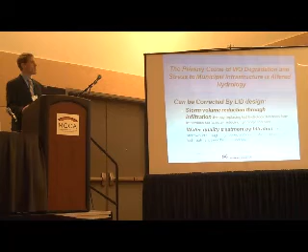So it'd be nice to say that we see a clear trend. The wet ponds in general do perform somewhat reasonably well. The dry ponds don't do very well at all, and the swale really has no pattern of performance. That represents 95, 96, 97% of our stormwater management today. That explains much of our current water quality woes. So the primary cause of water quality degradation and stressed municipal infrastructure is very simple. It's altered hydrology. And this can be corrected by LID designs.

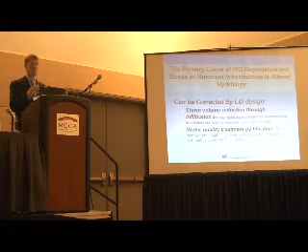LID designs look at storm volume reduction through infiltration, so basically recreating that hydrologic cycle, putting some of the water back into the ground. And that same element of filtration or infiltration has a water quality benefit. You're essentially using a natural soil or an engineered soil media to do much of your treatment. LID designs are not rocket science. It's important that they're built right. It's important that they're designed right.

But in effect, much of what we're building are stormwater leach fields. We've been building septic systems for a long time. We've been using sand filtration for drinking water treatment for hundreds of years. These concepts are well-proven concepts. We're now just beginning to apply them to stormwater management. So that's where the Stormwater Center comes in.

Our function is really two-part: research and development of stormwater treatment systems, and secondly, to provide an education and outreach resource to stormwater management communities. The function of the Stormwater Center is for us to test stormwater management designs to see what works and what doesn't work so that you don't have to.

If you have ever been through the design and planning of a stormwater system and had to go in front of a planning board or town council and go through the process of trying to convince folks, if you then have a system fail, that's the last time anybody's going to try that in that town for quite a while. So you want to have the bugs worked out in advance.

So a little bit on the Stormwater Center. We have a 9-acre field. We have a 9-acre watershed. Everything is plumbed to the corner of the lot. The lot was actually built in 1996. And we built this site in 2003. All the water comes to the corner of the site and is then plumbed into parallel treatment systems. So we have a 1-acre site. We've tested a little over 20 systems now.

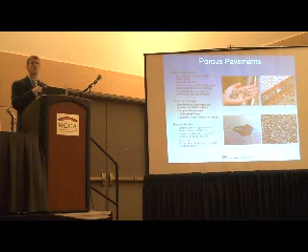So a porous pavement system has a pavement on top and then has a fairly sophisticated reservoir subbase underneath it. There is a storage reservoir, there's a filter course, and then there's a capillary barrier. The capillary barrier would be the bottom layer that you would design to reduce freeze-thaw impacts in northern climates.

Pervious concrete. Probably the most important element to know is it's very tough to install. You need to get qualified installers in it. When you get a quality installation in place, it's bomb-proof, and it'll last for a very long time, and probably outlast any other pervious pavement. But it's hard to install.

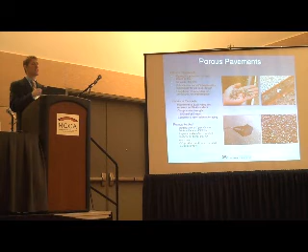Porous asphalt, on the flip side, is very easy to install. If somebody has installed asphalt before, they can install porous asphalt. The difference being that the subbase is critical, and that the mix is important. So the design, the mix production are really the key elements. And when you look at porous pavements, it's not hard to find a lot of failures out there. I would say the majority of failures are really two reasons: poor mix production and poor engineering oversight.

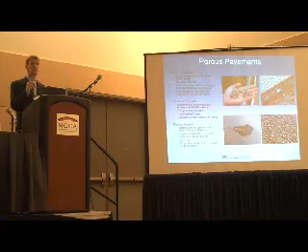It's not like a lot of projects where engineers design them, they sign off, and then they're lucky if they see the site again. You need to pay attention to the compaction of the site. You need to pay attention to the mix that's being delivered to the site. It's a lot more than a traditional parking lot.

So how do they work? Let's give you an example here. This would be the equivalent of a 43-inch rainfall event in about 3 minutes. So in this area, that's roughly a year's worth of rainfall in about 3 minutes. This is a pervious concrete parking lot. In the interest of time, I won't let this run the whole time, but it's really quite impressive. And we actually did this demonstration last week where we're running one of our porous pavement workshops, and it functions the same in the winter as it does in the summer.

So this is an example of what performance looks like out of a porous pavement. So this would be our rainfall on the top. This is a 0.6-inch rainfall event. It's a pretty big storm. This is what the rainfall runoff would look like on an impervious pavement. Here is the rainfall runoff out of a porous pavement system. Okay, at about 800 minutes, it creeps out of it. There's almost no runoff. This is on a C soil. This is a site that a lot of folks don't even try to do infiltration on.

Porous pavements are really not your typical infiltration system. Because you don't have a high hydraulic loading rate, you have the same watershed area as treatment area. You're not constrained by the same challenges that you typically are with bioretention and other things. You don't have those limitations.

Here's a 3-inch storm. This is greater than the 2-year storm. This is a big storm. Here's your rainfall runoff on an impervious parking lot. Here it is about 1,000 minutes later, just creeping out of the pavement. And this is not surface runoff. This is not running off the top of the pavement. This is what's coming out of the subdrains of the system.

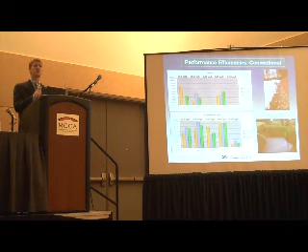Reason why I bring this up is one of the biggest concerns about LID is how are they going to function in the wintertime, right? Well, the first thing you do is evaluate all the systems, conventional as well as LID, across the winter. So here's our swale. This is probably 98% of what's out there. It's doing fine in the summer, does nothing in the winter. So an annual removal efficiency of maybe 30%. This is for solids, and in the interest of time, I'm going to focus on solids.

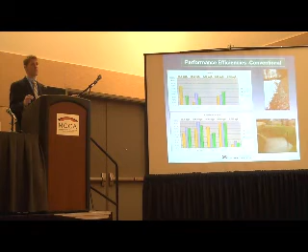Here's our pond. Does annual removal efficiency maybe 70%. So if you consider that EPA is in general looking at 80% removal efficiency for TSS, our conventional practices are not meeting that. Vegetated swale is slightly better.

If we move into the LID style systems, annual performance efficiency doesn't really vary. We're well over 90% removal efficiency for a bioretention system, and we're at about 99% removal efficiency for a gravel wetland. These are high-end treatment systems. They do a lot more. They're going to cost more, and you're going to have to pay closer attention to them. You don't get more for less.

Porous asphalt, and this is a subsurface infiltration system. These are the large chambers that go below parking lots. The reason I put these 2 systems together is because functionally they're very, very similar. It's the storage underneath the pavement and the fact that it's going through a filtration layer, which is essentially the sand underneath it. And you can see very, very high level of treatment.

So high level of treatment is not limited to LID, it's filtration systems, really. LID just happens to be an easy way to get to filtration. So here we're at about a 99% removal for both of these systems, both porous asphalt as well as ADS subsurface infiltration.

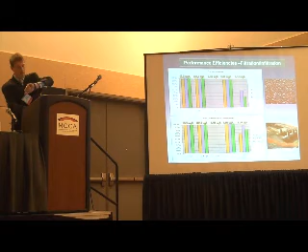5 minutes. Okay, 5 minutes. 5, all right.

Okay, so now we'll look at some of the manufactured devices. These are important systems to consider. Not every system can go in every location. You can't put a gravel wetland, which is 5% of your watershed area, in the middle of an urban location. However, if you have a dry pond in a location where you're in an impaired water and you need to identify retrofits, you can fit a very large system like a gravel wetland in a dry pond. It's a simple retrofit. But in a lot of urban locations, there are these types of systems that need to be considered. They go subsurface.

I do have hope for these things, though. The next thing we're going to be testing, offline configuration. If they're really getting 80% in the lab, they should be able to get 80% in a proper design situation. So it really is likely going to be that they have to be done offline, and that's what New Jersey DEP is now requiring.

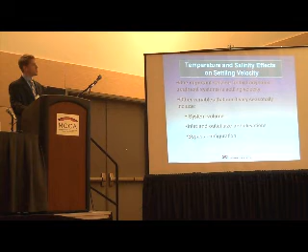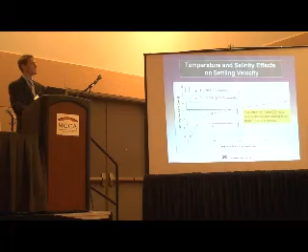The basic issues we look at, temperature effects, is really this. Hydrodynamic treatment systems, any system that relies on settling velocity is heavily impacted in the wintertime. And it's really this. Here's your 2 settling curves. Here's a settling curve in the wintertime, high chloride water, low temperature. Here's warm water, no chloride. And what you end up with is a system where the settling velocity for your particles have essentially been halved summer to winter, which means if you're designing for optimal performance, you're doubling the size of your system.

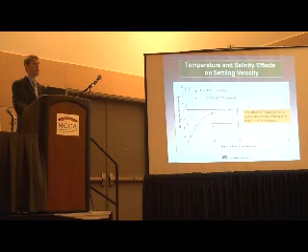I can tell you nobody's doing that. But if we are required to meet water quality requirements for wet weather monitoring, which here in Charles River now with the new EPA requirements that are coming up, you are going to have to be looking at water quality monitoring, not simply am I implementing my stormwater management plan.

So one other element to mention here is salt reduction. This hasn't hit a whole lot in Massachusetts yet. It's hitting in the I-93 corridor. EPA is beginning to pay attention to chloride loading, salt loading, and impacts to drinking water and groundwater. It's not a small issue. 4 of the 6 chloride TMDLs in the country now are in New England. This is a big deal.

And it's really a simple balance. How are you going to balance public safety with aquatic habitat? We know we're going to go with public safety. So salt reduction is not the simple answer. There's no way to treat salt with a stormwater BMP. One element of it, though, is looking at porous pavements.

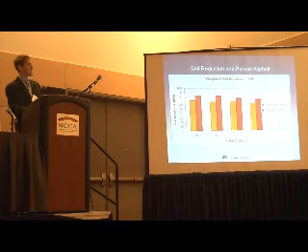But here's skid resistance. This is your braking ability. Higher the number, the better. Here's our 4 different application rates. The take-home message is that the 0% application on the porous asphalt has a higher friction factor than the 100% salt application on a regular pavement.

All right, and I'm actually going to skip this because I want to leave Sarah some time. So just what exactly is your point? It depends on what we're targeting. If we're targeting for the big stuff, we can get it easily. We can definitely get out shopping carts. There are no silver bullets. There's no one system that's going to do it all. Water quality, you have to target multiple items for multiple contaminants.

And really what we're looking at is treatment trains. Filtration or LID systems function well in cold climates. The best results are achievable through LID-style infiltration approaches. Pre-development hydrology is achievable for new development, and I already mentioned the need to employ a treatment train.

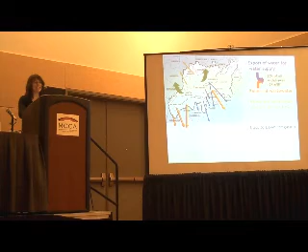In addition to the wastewater export, it's got infiltration into those wastewater pipes, which are taking clean groundwater out of the basin and shipping it out along with the wastewater. So that's further reducing the aquifers and the water table, and further reducing stream flow. However, exacerbating this problem is a lot of lawn irrigation, which creates loss because grass is very thirsty and sends that water back to the sky pretty quickly. And an increased loss due to runoff. So the flooding conditions that we see when it's storming are the counterpart to the fact that that's not getting back into the ground, as Rob mentioned. And it's the water in the ground that feeds our streams when it's not raining.

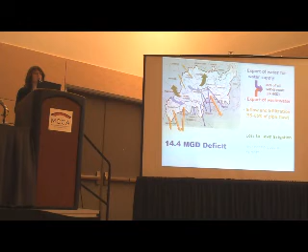So it's been estimated that the Ipswich runs at about a 14.4 million gallons a day deficit. That flow, on average, should be 14 million gallons higher. So we're not dealing with the export of wastewater at this stage, other people are, but under the grant we were looking at approaches to try to address some of the concerns associated with the lawn irrigation and the increased loss to runoff. So it's that last piece that I'll be talking about here, the low impact development work we're doing. Overall then, the grant is demonstrating low impact development to deal with that runoff problem. It's demonstrating water conservation projects to get at that lawn watering in particular and some indoor uses. And then we're quantifying all of our demonstrations and the impact that they're having.

And we have been, in conjunction with the U.S. Geological Survey, taking the data that we're finding and modeling at a watershed scale. Are we going to actually see a return of flows to the Ipswich if we were to spread these techniques across the watershed? And if everyone were to try to adopt some of the approaches that we're modeling, will it make a difference? And then we're also using our demonstration projects to educate people. What are we finding? What are the lessons learned when we implement them right here in New England and Massachusetts? And I'm going to talk particularly about the demonstration projects on the low impact development side. There's 4 of them. There's a subdivision, a green roof, some work to retrofit a neighborhood that's impacting a lake, and a parking lot where we demonstrate 4 different kinds of permeable pavement.

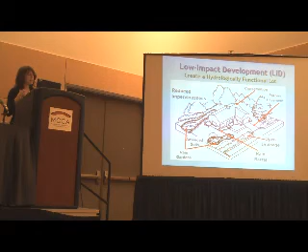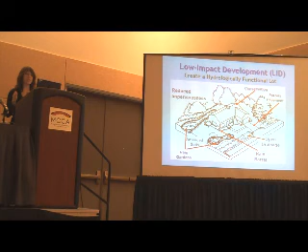You've already heard a little bit about the purpose of low impact development. In short, you're trying to create a hydrologically functioning lot that behaves similarly to the undeveloped conditions, not identical. And some of the ways you achieve that is to reduce the amount of imperviousness, and then to use grading and preservation of open spaces and engineered gardens and planted areas and other technologies to try to direct the water that does shed off the impervious surfaces into places where it can infiltrate into the groundwater.

So our LID subdivision demonstration is in Ipswich, Massachusetts. It's called Partridgeberry Place. We work with the Martins companies on this, and their engineer was Meridian Associates. And we joined up with them in partnership when they were already largely through their permitting and construction of this project. And they already were very conservation-minded in their approach. In particular, this was a very clustered site.

This is 20 houses. They have preserved almost 3/4 of the site as undeveloped forest. And they've clustered large-scale homes. These are $750,000 homes on less than quarter-acre lots. They've narrowed the roads. They have drained all of the roofs to dry wells, and they planted all their landscaping with native vegetation. In order to achieve that level of cluster, they had to have a shared septic system, which they were able to get permitted.

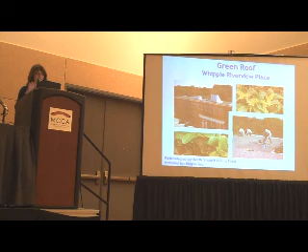This is another project in Ipswich. It's on a redeveloped building that was a factory at one time in its history. It was a school at a different point in its history. It's a pretty small building. It shares a parking lot with Town Hall in Ipswich, directly across from it. And it's redeveloped into senior affordable housing. It's about a 3,000 square foot roof, and we had an extensive green roof installed on that with mostly sedum plants and about 3 inches of soil.

And the questions that we're asking here are, to what extent is the volume of runoff reduced from this roof relative to the town hall roof, the conventional control right across the parking lot? And to what extent are the concentrations of pollutants reduced due to this technology?

And this is a building that is right on the Ipswich River. It's about 50 feet from the river, so it's a situation where it does make sense to think about green roof as a technology, because it's going to help you reduce runoff and help you clean the runoff you are experiencing. It's not going to do a good job at recharging groundwater, so we didn't think about installing this in the upper fragile areas of the watershed where our highest priority was recharge. This is much more of a non-point source solution.

Some of the implementation lessons here: we did look around for a while. In some of the newer buildings, there was a maintenance shed for the DPW that we looked at in Ipswich that didn't have a strong enough roof. The roof on this building was bomb-proof. All they did was put our entire new roof on top of the old one. But you do need a building that you're either constructing with a little bit of extra load-bearing capacity or that already has it. These are heavy roofs.

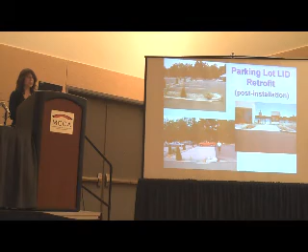So we used permeable pavers, we used porous asphalt, we used a material called gravel pave, which is again a plastic matrix that is just below the surface of the gravel that keeps it from compacting, so it retains its infiltration properties, and a proprietary product called FlexiPave, which is made out of crushed and recycled tires.

And our research questions on this site were actually, is groundwater quality negatively impacted by converting the surface to a permeable surface? Are you going to be getting the salt and the car pollutants, heavy metals now down into the groundwater by making that permeable surface? Are we successful in reducing beach closures? And what is the performance of these technologies in the winter in particular?

Let's see. In general, this has been a very successful project. I think I'm running out of time to tell some of the anecdotes. The security and vandalism was kind of interesting. We had the landscaper put in several plants with balled roots, and they were stolen within days of being put in. So he went to planting non-balled root plants and had to reduce the size and attractiveness of those for theft. That was interesting. So far, all of the pavements are performing to spec. They're draining well, even in the winter.